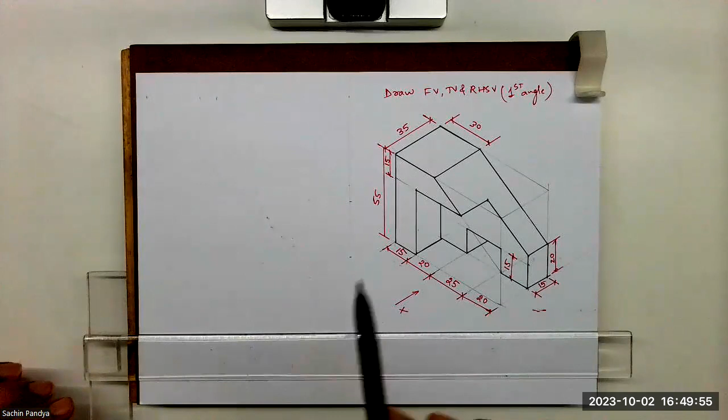Welcome to technical drawing. Today we are going to draw front view, top view and right hand side view in first angle. This is an object. When you see from here, this is front view, top view and right hand side view.

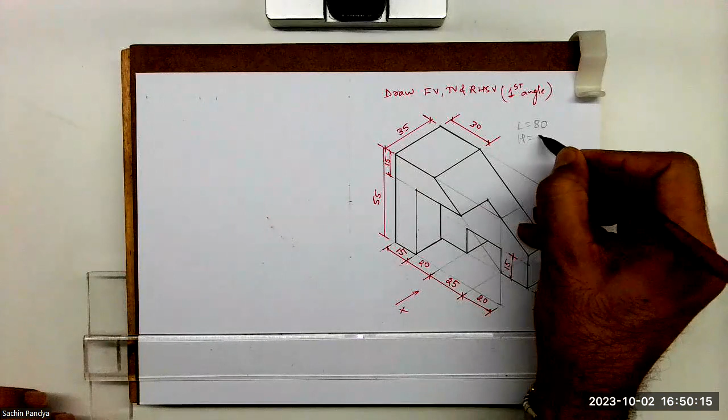If you see, length is 20 plus 20, 40 plus 25, 65 plus 15, 80. Length is 80, height is 55, and width is 35. So what we will do: first we'll draw a horizontal line.

Then we'll take the height. How much is the height? 55. So I'll take 55 up. I'll leave 10, and then I'll mark 35 down.

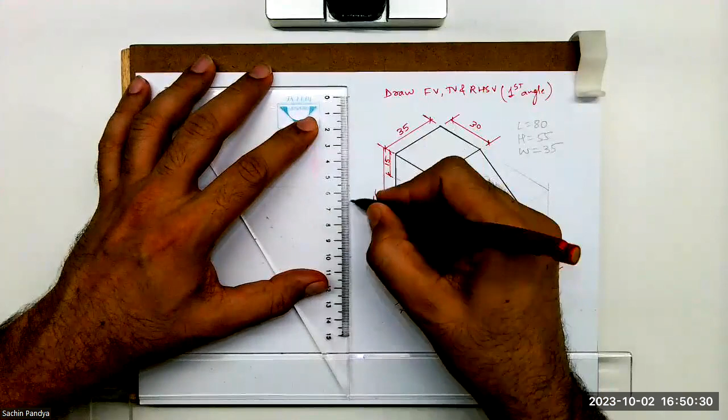This way we can draw, right? Length is how much? 80. So I can mark 80 over here.

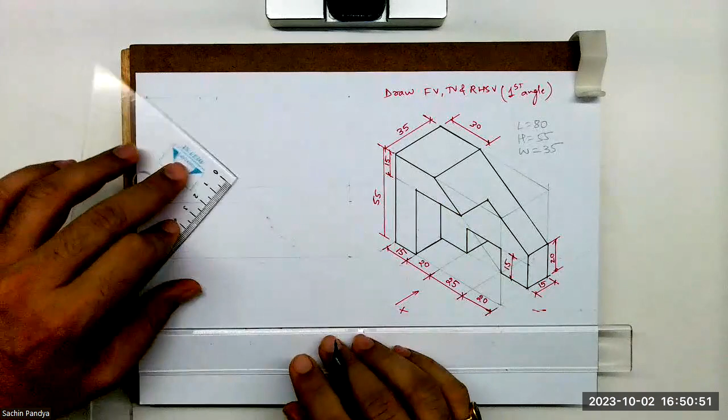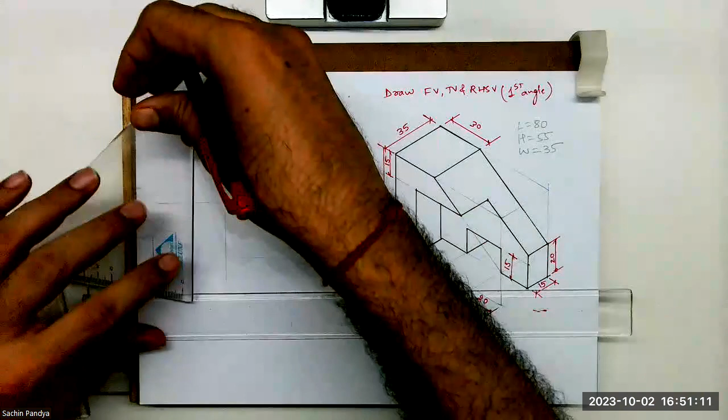After that, you take 45 degrees, and from here you take 45 degrees. Wherever it will cut, from there you go up. From here also, you take this point up. This is how it will come.

This is front view, top view and right hand side view of the box. So we are done with the box.

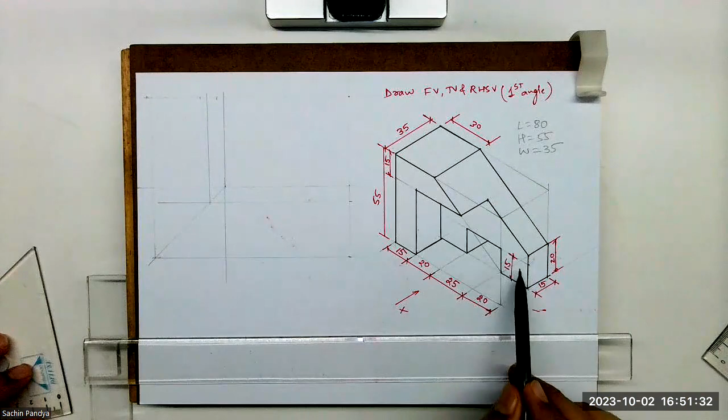Now when you see from the front, you will see this part in front and this part. And if you see, there is a slope. So what we will do is first we will draw a slope.

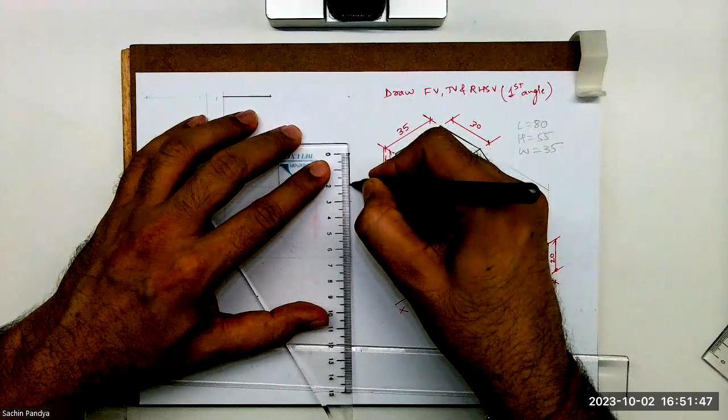How much is this? 30. So I'll take 30. How much is this height? 20. And you draw the slope.

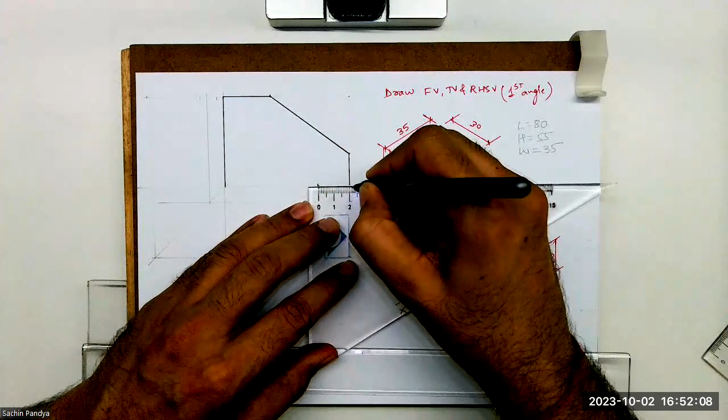This height is vertical, and this is horizontal, but we have this slot. It's 20. Then we have 25. Again we have 20, and then we have 15.

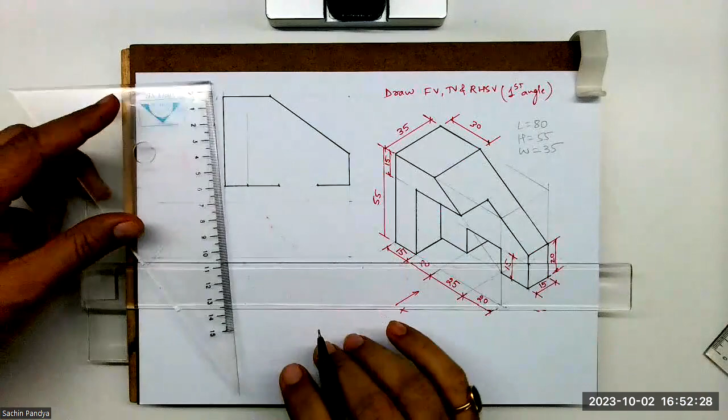Then you take this up. Now, how much is this height? 15. So take 15.

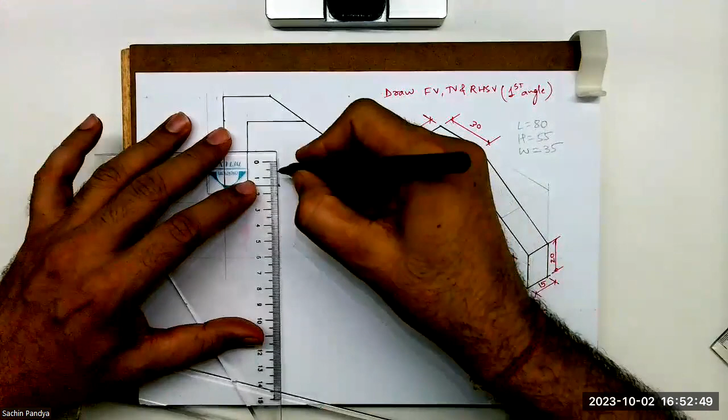And you draw a horizontal line, and from here you draw a vertical line. And this height is 15. You go up by 15.

This is how the front view will look like, this part and this part.

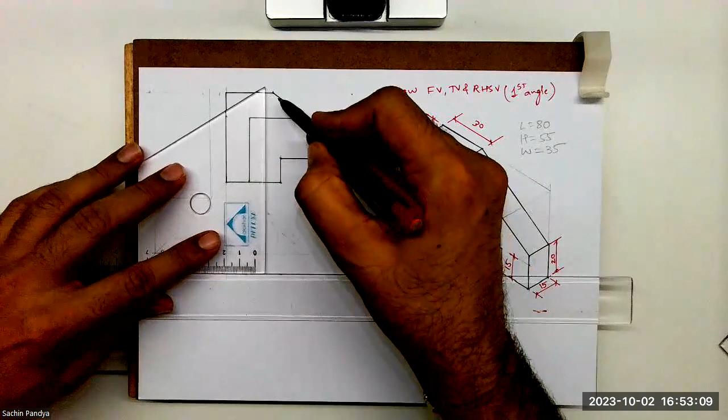Now we'll see the top view. So when you see from the top, you'll see this rectangle. So that I can project from here, and it'll be fully dark.

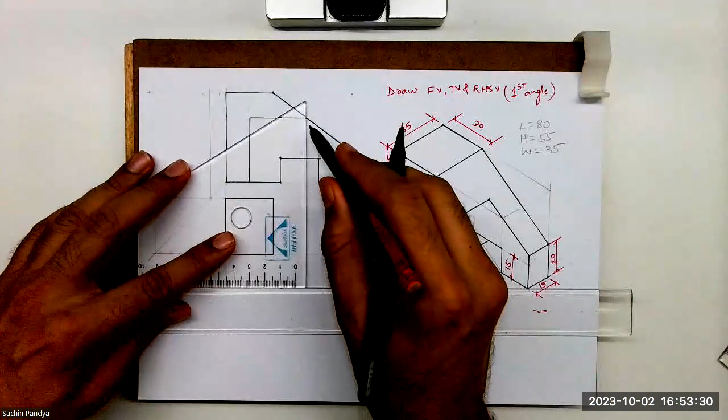I can draw a horizontal line from here as well as from here. Then this, it goes inside, that I can project from here. How much is this? 15. So take 15.

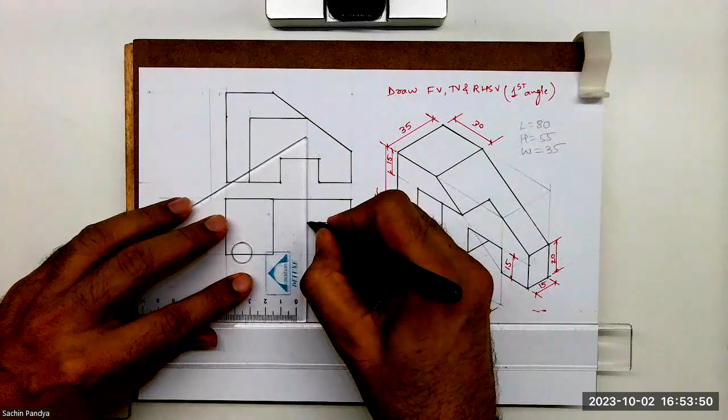Draw a line down. This way it will come. Now there will be a dotted line in the top view.

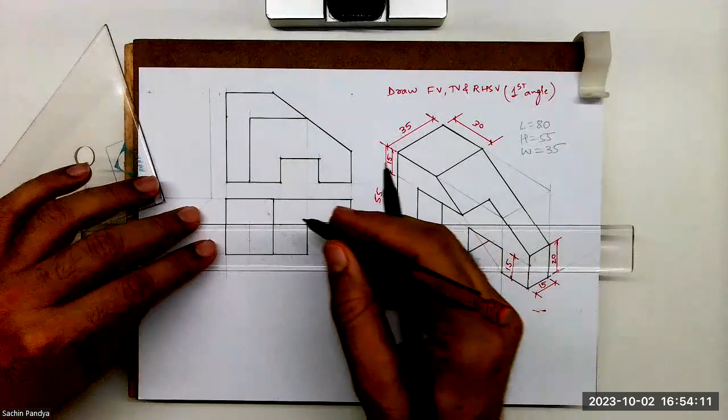First is this, see this part, right, and this part. So what we'll do is we'll extend this, and we'll extend this. This one will be dotted.

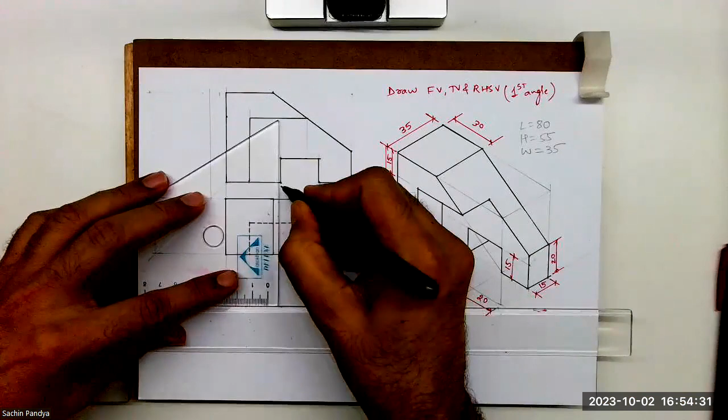And this line, this is dotted. Dotted. This is the top view.

Side view. When you see from the side, you extend from here, you extend from here.

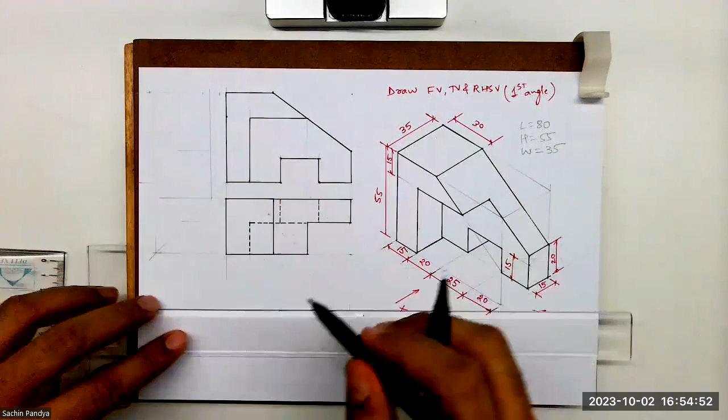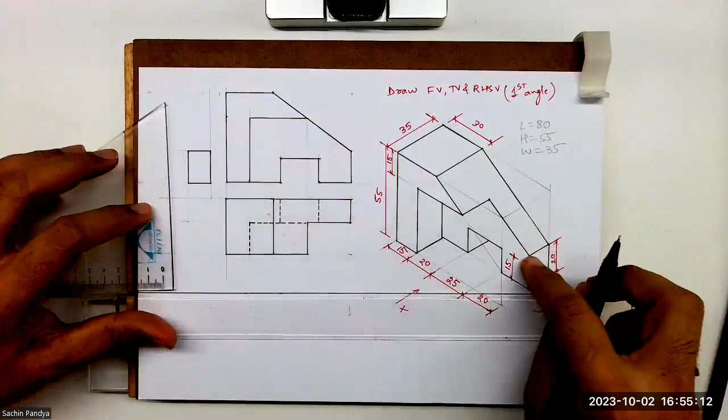Then we have this part. You extend from here like this, and you extend this.

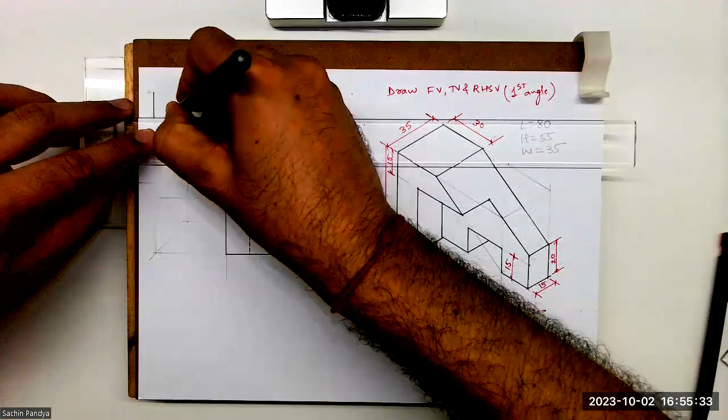See this. This is what you will see in the side view, plus this part.

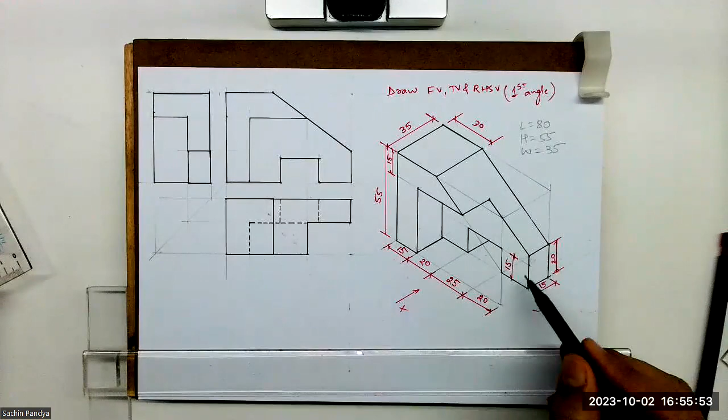Then this dotted line. When you see from here, you can't see, right? Height is 15, so that dotted line we need to draw.

So we are done with front view, top view, and right hand side view in first angle. I hope everyone understood this. Thank you.